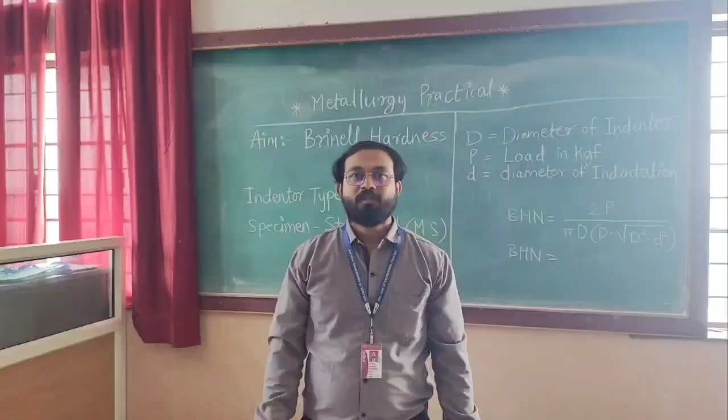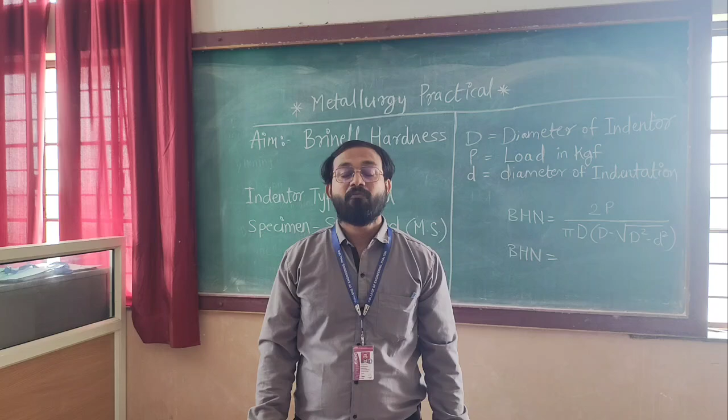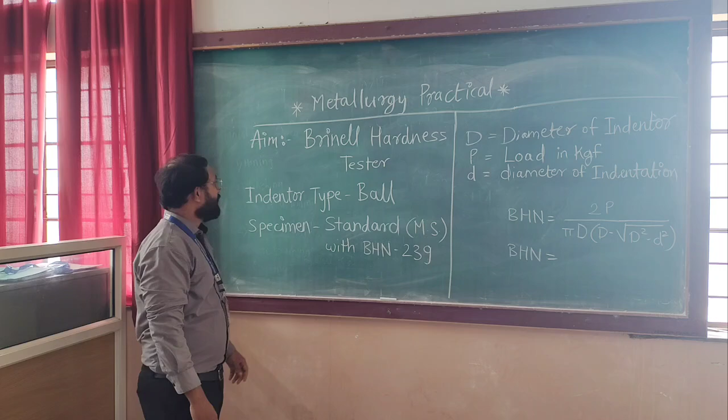Today we are here to have insights in the practical for metallurgy. Today we are going to conduct the practical on the Brinell hardness tester, where we are going to find the hardness of a material. We are going to have the standard specimen, for which we are going to find the Brinell hardness number. So in this practical, we are going to have the indenter of ball type.

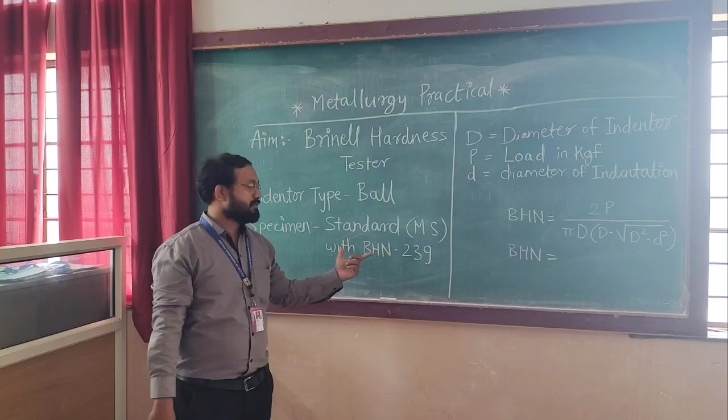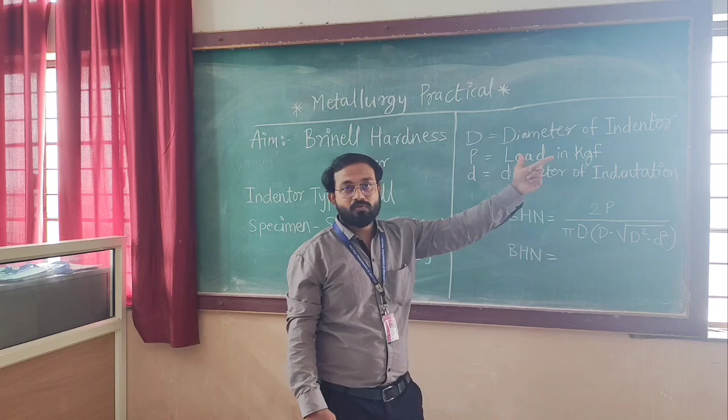The specimen we are going to use is the standard specimen of MS, and for this standard specimen the Brinell hardness number is already known to be 239. Here the capital D stands for diameter of indenter. The indenter which we are going to use to impinge or penetrate the specimen is the ball indenter, and its diameter will be 5 mm.

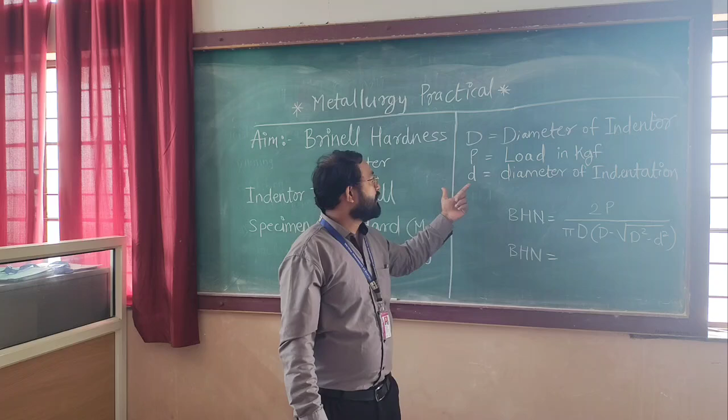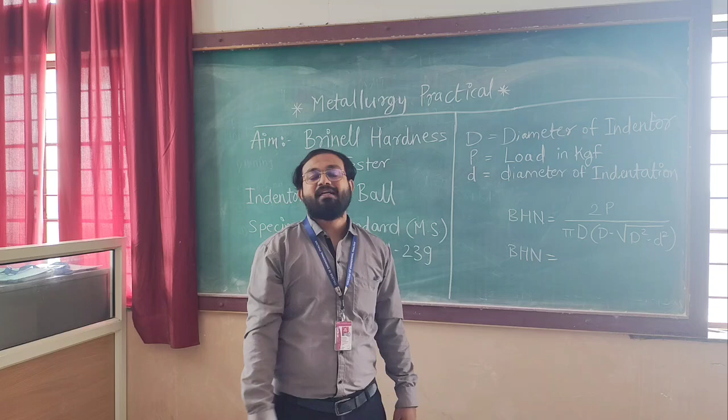Then the load which we are applying will be 250 kg. Then the small d, that is the diameter of indentation, we have to find out after the indentation is done by the ball. Now we will go to the setup and perform the experiment for the Brinell hardness tester.

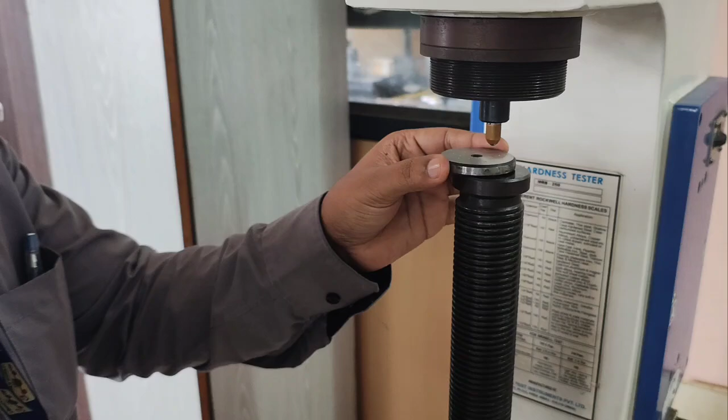We have to place that point under the indenter. So I am just keeping this, touching this, and after touching we have to apply a minor load. The minor load of 10 kg must be applied. As soon as this ball indenter presses on the specimen, the dial goes to a red point. At that point we understand that 10 kg of minor load is applied on this specimen.

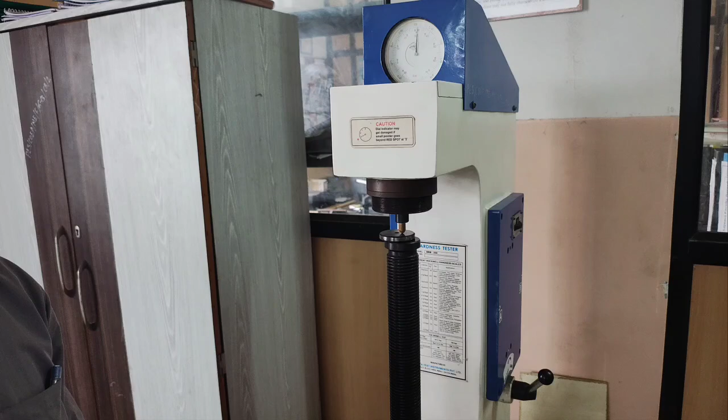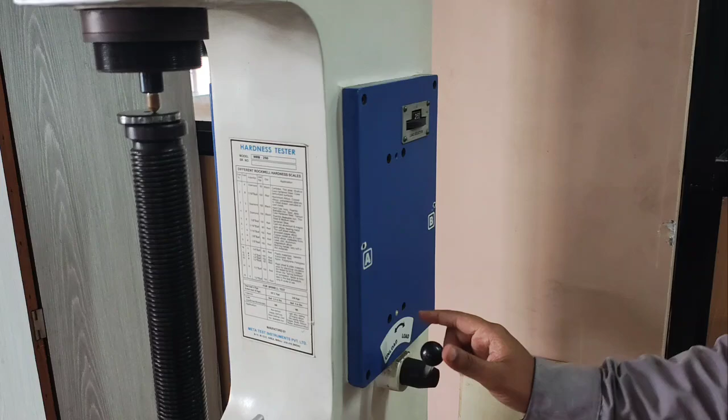As soon as the minor load is applied, we have to check whether the major load selector is set on 250 kgf. Here we have confirmed that the load is already 250 kg, and the lever is in unload position. Now we will slowly load this so that the weight from the ball indenter will be applied on the specimen.

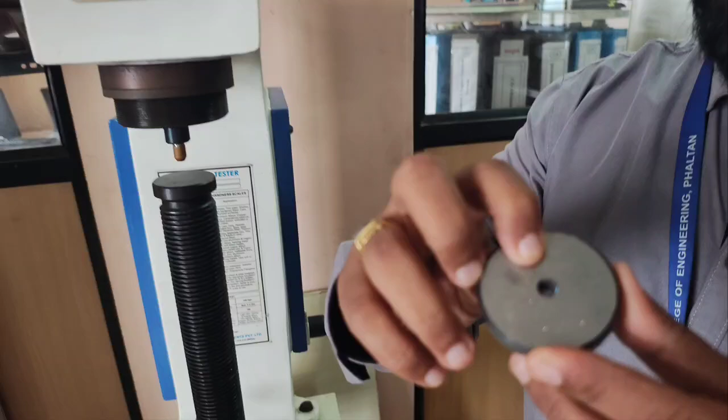We apply the load till this dial gauge becomes stable. Now we can see the dial gauge has become stable, and now we are unloading this. Once unloaded, we take it down, and you can see an indentation mark of the ball. We have to measure the diameter of this indentation using the micrometer, and this diameter will be our small d, that is the diameter of indentation.

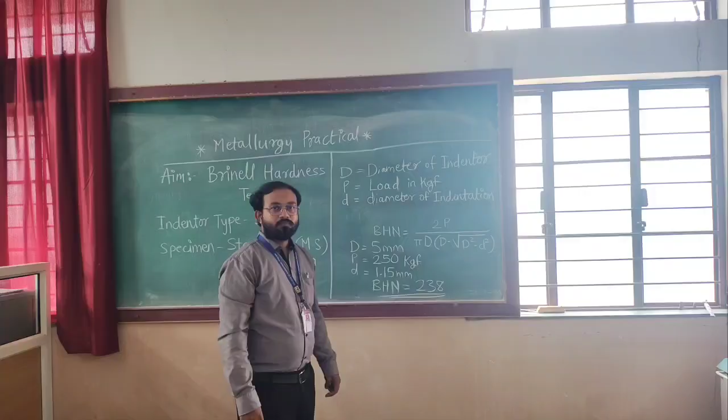Using the micrometer we will check this diameter, use the formula, and find out the Brinell hardness number. The formula is BHN = 2P / (πD(D − √(D² − d²))), where capital D is the diameter of indenter, small d is the diameter of indentation, and P is the load which we have applied.

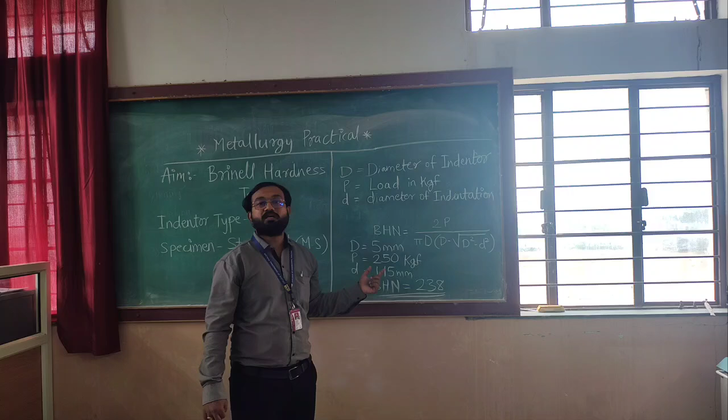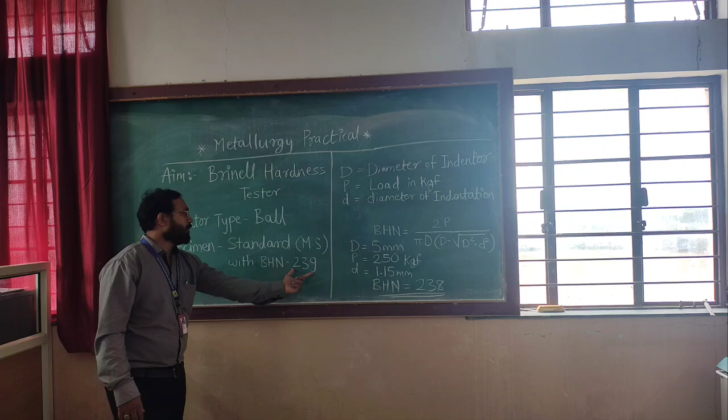From the given values, D, the diameter of indenter, is 5 mm. The load we applied is 250 kg, and the small d, the diameter of indentation measured using the micrometer, is 1.15 mm. If we put all three values in this equation, we get 238 BHN, that is Brinell hardness number, very close to the standard value.

So this is the procedure for measuring the hardness of a specimen using the Brinell hardness tester.